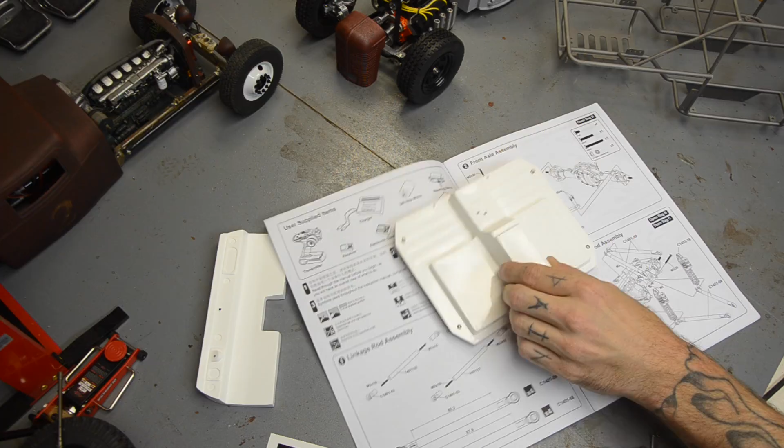All of these panels are fiberglass, and they are gel coated like a boat hull. So there's a texture on the bottom. It's not like an old fiberglass shower where you're going to get splinters off of it. It's gel coated lightly on that, but this is the smooth side, so I'm not sure how paint's going to stick to that. I may have to do a little scuffing just to texture it a little bit so the paint has something to adhere to. The floorboard and the dash are actually glossier than the body, but they're all done in about the same process.

So we do have some stickers. I forgot to even show you all this stuff. I got the instructions out. Again, this is a kit, there's no electronics. We've got a TFL flyer here.

They make axles for SCX10.2s already. Got lots of cool stuff. Really, being here in Texas, I've never heard of this stuff. This thing's got a carbon fiber chassis, it's pretty wild. They got all these accessories, different wheels and tires. They even have tools, nice tool sets with holders, which is pretty cool. I need to get me one of these stands, that would be handy for trying to do stuff, spin it around. But yeah, that's kind of cool.

You know, stuff like this used to... I don't remember, if you buy a Lego set when I was a kid back in the 80s and 90s, for me, I would open it as soon as we got to the car at the store and pull out the book. I always wanted to look at the book, it had all the other new kits that you could do and buy. And that's kind of cool that these came with that. It's just one of those little small things that makes me smile.

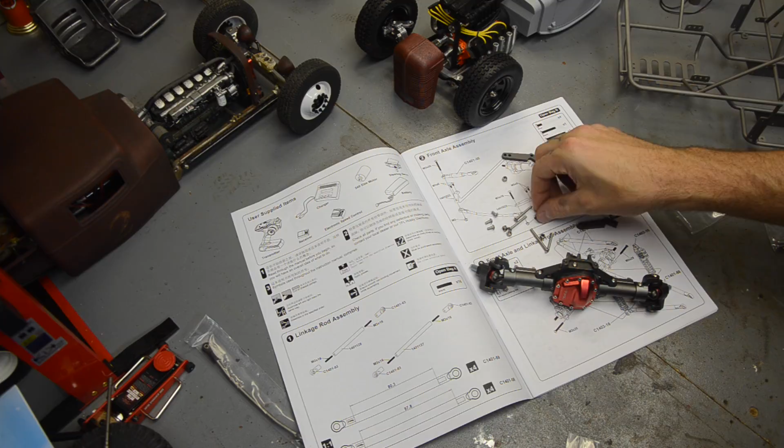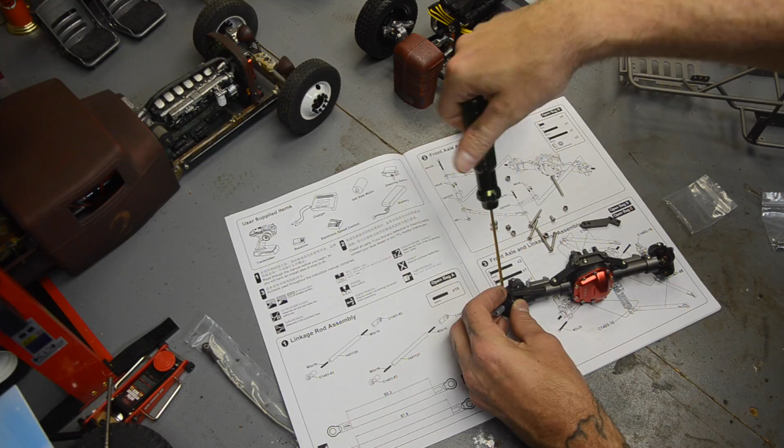With the 3mm hardware, yeah, alright, let me get the right tools out. Still using my Team Integy circa 1999 hardware tool sets that I've had forever. They still work well, other than the 1.5mm broke, but you know, we always break those.

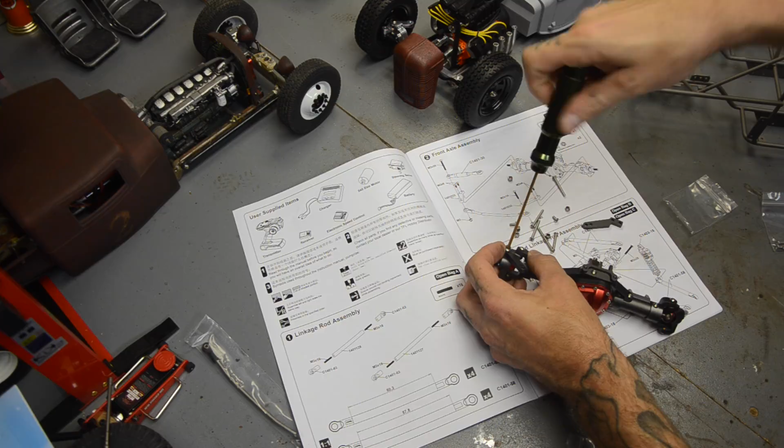So yeah, I'm gonna go ahead and throw these on. It shows to put our steering link on after that. I gotta get some Loctite because I just remembered I didn't have any out. So I'm gonna get those steps done and then we'll come back.

Alright guys, I went ahead and knocked out 2 steps. Everything's going together fine, all the hardware has been there and where it's supposed to be. Only issue I had was Loctite - don't put blue thread locker in red containers, you confuse people. As soon as I cut the tip off of it, it squirted out everywhere. So I've got a puddle here on the workbench I'm dipping my hardware in as I need to Loctite them.

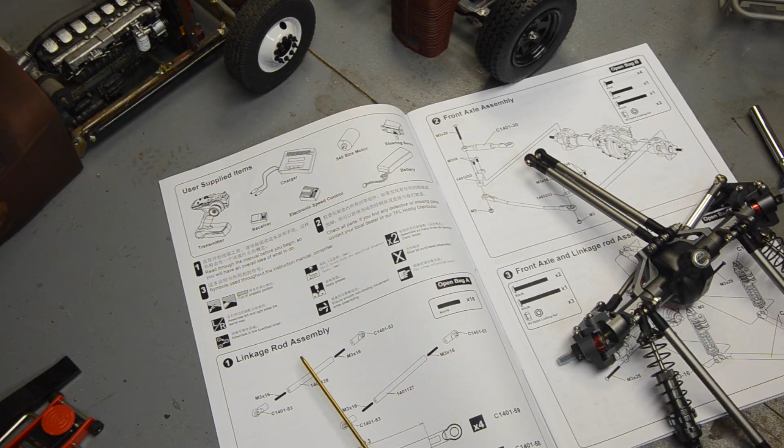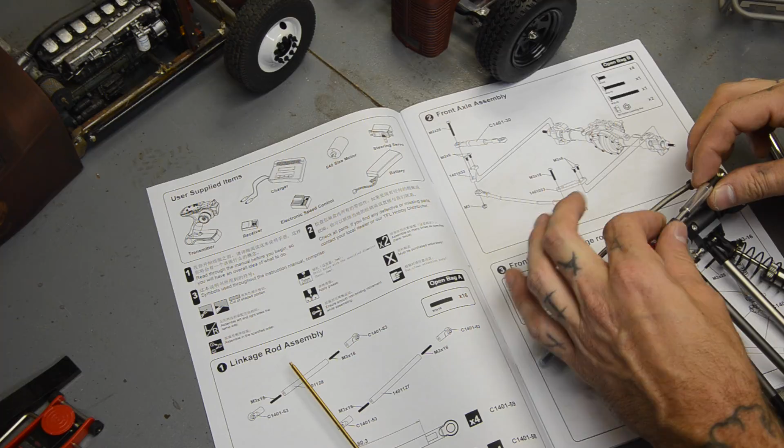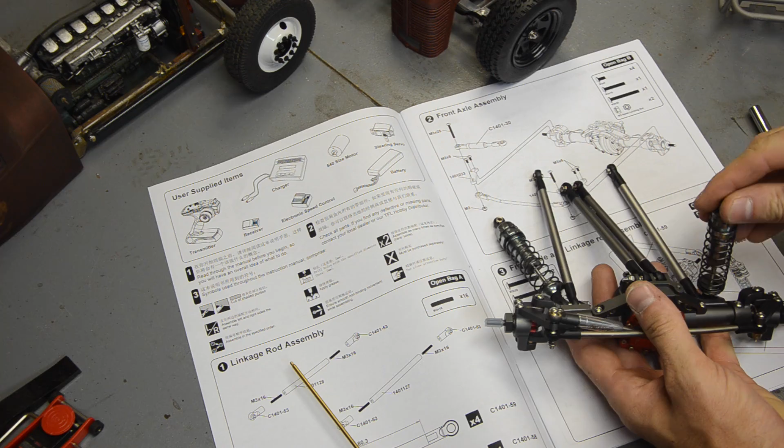Everything's looking good, the steering rods and everything are nice and solid. My drag link here is adjustable, it just screws out, looks like a hydraulic assist steering setup. I'm not sure yet how far out that needs to go, so we'll just leave that alone. It's basic, like SCX10 style setup, with triangulated 4-link shocks mounted to the lower link mounts, and coil spring suspension. Really nice looking hardware though, man, it's all solid, I like it.

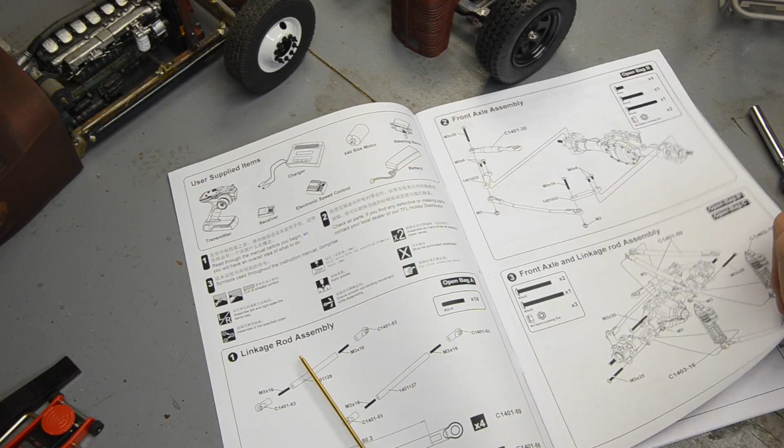So let's set that aside, see what page 2 brings. Rear axle, same thing, then I gotta find a motor.

Alright, so I'm gonna go ahead and throw the links and the suspension, or shocks I'm sorry, throw the shocks and the rear suspension on the rear axle, and start looking for a motor so we can move on to the next step. Alright guys, rear axle is done.

Same as the front, minus the steering. Everything's simple and easy. I'll say the hardware for this kit seems very high quality. It looks like stainless, I don't know if it really is or not, but I haven't rounded off any heads yet. Everything is nice and tight, and it's been superb. So it's nice for a change.

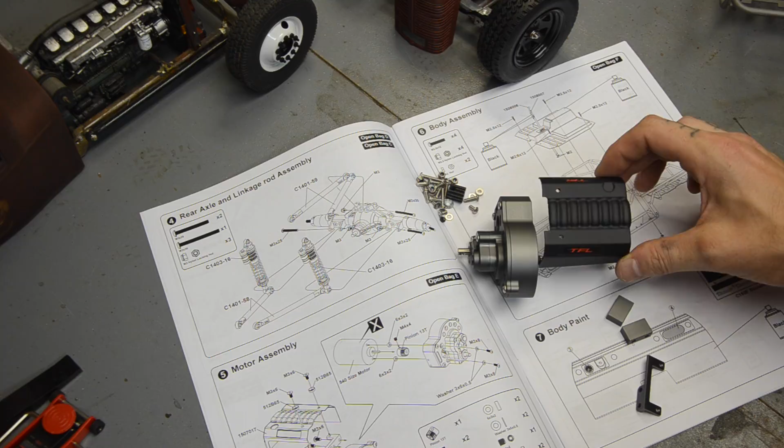So next up is the transmission. I've got the bag E dumped out here, and got my LS engine cover. I know that's going to aggravate some of y'all, it could be a Hemi. I mean, it's just generic, but it's kind of cool to have something to cover the engine, even though the hood doesn't open on this. It does look like a... well, I don't even know the Dodge numbers. Could be a Chrysler Hemi. The crate motors have an intake setup like that. But anyway, that's neither here nor there.

So I have all the electronics I need for this car, except the ESC. I had a spare set of good stuff, and I stole my Axial AE2, whichever one's the little Castle knockoff. I stole that and put it in the #1 rat rod build when I did that because I needed something. So that may be coming back out of there.

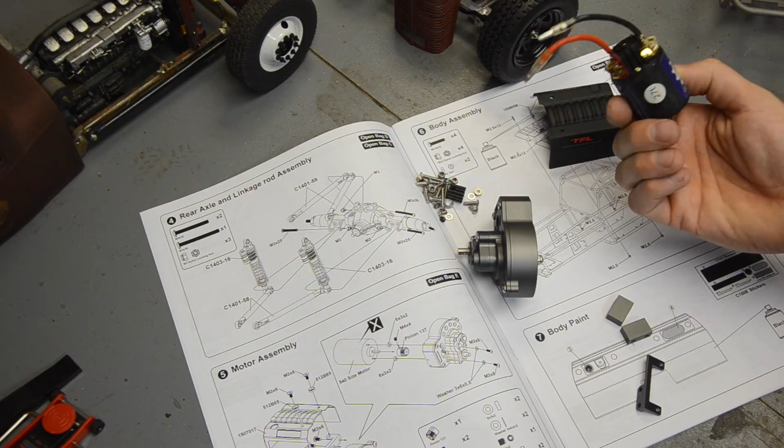I have another basic Tamiya ESC that could go into that, since that's not going to be driven much. But for the motor, I've got my Holmes Hobby Torque Master Expert 27 turn. This little engine, man, it can go. It's got amazing low end torque, more than my 55 turn brushed Novak Super Crawler Rooster thingamabob that I've got. And it has 3 times the top speed. It's a really good mix. I love Holmes Hobby motors, I'm not sponsored, they are just good stuff. They've got an application for anything you can think of. If you haven't seen ESPRC, he does his Holmes Hobby motor control videos almost weekly. They literally have an engine for everything, brushed, brushless, anything from hand wound high speed to hand wound low torque. They got it all. So I like this engine.

It might be a little peppy for this thing, but we'll find out once we get it in.

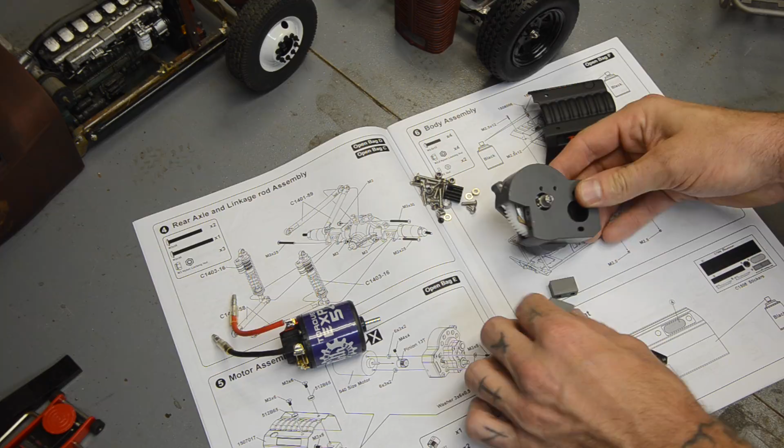But yeah, it's pretty straightforward. We've got a couple brackets here that I don't think it calls out for yet. These are going to be spacers for the transmission to fit in the frame rail, so I'm going to set those aside. We have a bracket here that mounts our scale engine cover over our scale engine. Somewhere, I think it goes there. And that's about it, we've got set screws.

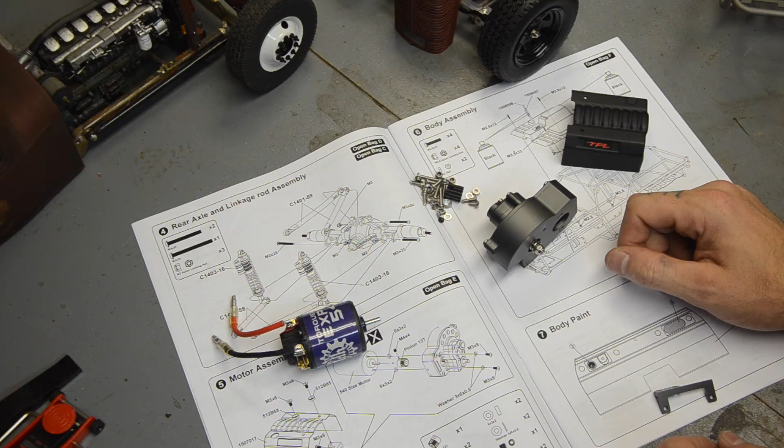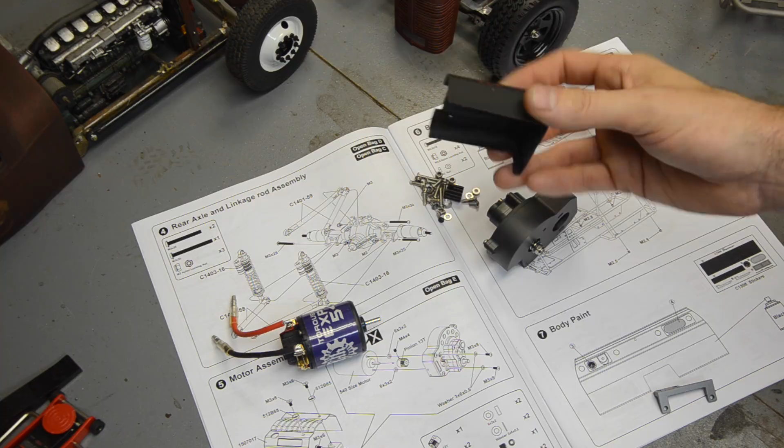This is fiberglass too, you can see the weave on the inside. The outside is perfectly smooth. Looks like, what do you call it, just a cast piece. It looks like injection molded plastic, sounds like plastic, feels like plastic, but on the bottom it's got that weave. It's pretty cool, it's a different way of doing things. I don't know if it's cost effective one way or another, but the finished product's pretty cool.

So I'm going to knock this stuff out real quick. This shouldn't take real long, and then we'll see how much further we can get.

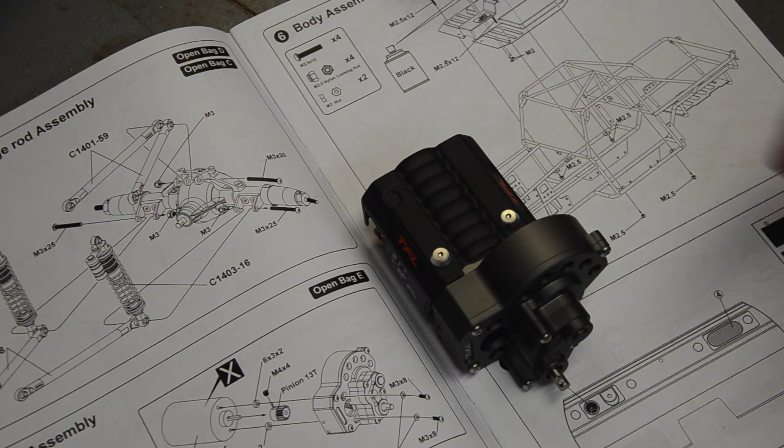Alright guys, got that together. Only thing that gave me trouble were the holes in the fiberglass engine cover, they are a little bit smaller, had to force thread them through. But it's in, everything looks good.

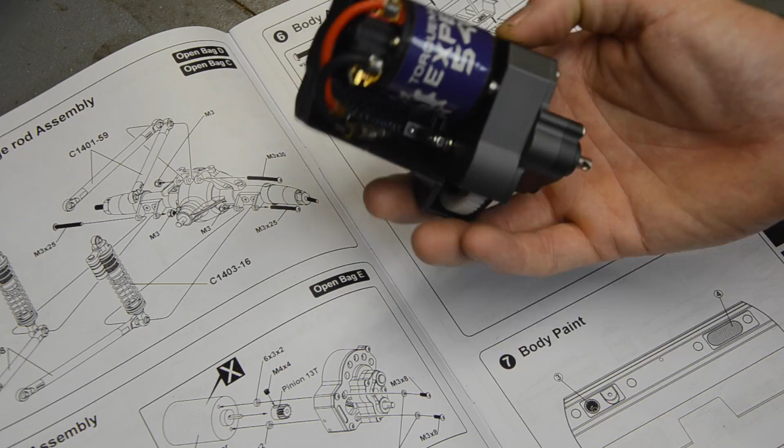I had a little bit of trouble with the engine. There's a bolt from the inside with a washer, and then they want a spacer between it. It's just a little tricky getting it all lined up and having Loctite on stuff. So not that big of a deal, it worked, it's in, no real complaints so far.

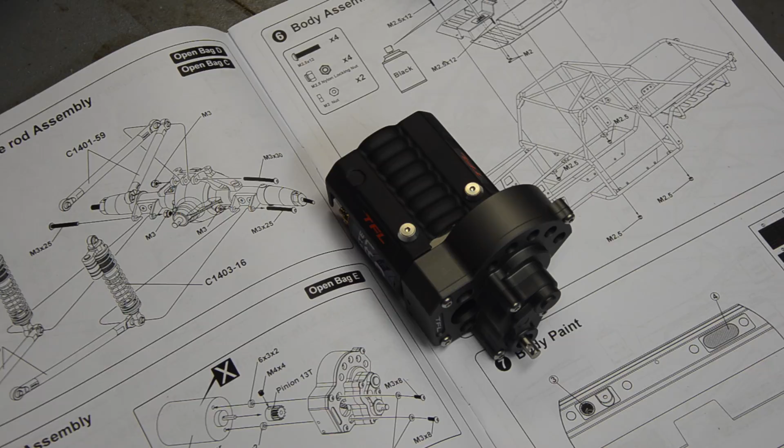So I think that's where I'm going to wrap up this installment. The next step here shows painting the floorboards, and I can't make that happen immediately despite my best efforts. So that's where we're going to wrap this one.